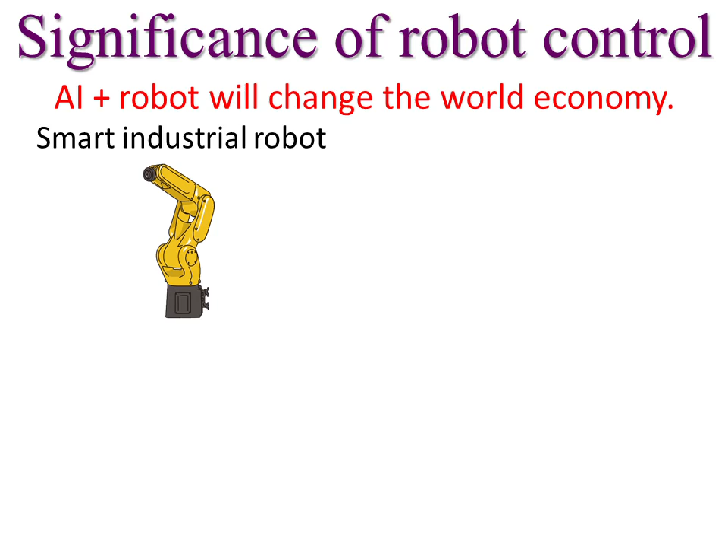In fact, shipments of industrial robots have quadrupled in the last decade. Robot control contributes to the accurate, quick and energy-saving operation of such robots. However, today's industrial robots can't perform as skilled a task as humans do, and many tasks are still performed by humans. In order for robots to replace these tasks, industry requires further innovation of robot control.

Several new robot industries are emerging, and cleaning robots are starting to work in our homes. In the future, mobile robots are expected to perform a variety of tasks in addition to cleaning. In fact, many venture and major companies are actively researching and developing mobile robots. In order for such mobile robots to efficiently perform tasks on behalf of humans while avoiding falling, many technological innovations are still needed, and the innovation of robot control is also required.

Although you don't often have a chance to see it directly, logistics robots are already widely used in practice. Such robots are used in the warehouses of companies that handle huge volumes of products, such as Amazon, to store, organize, and pack products into boxes for shipping. However, there are many tasks that are still performed by humans, such as boxing up a wide variety of products and moving packages into trucks. Further automation is required in the future.

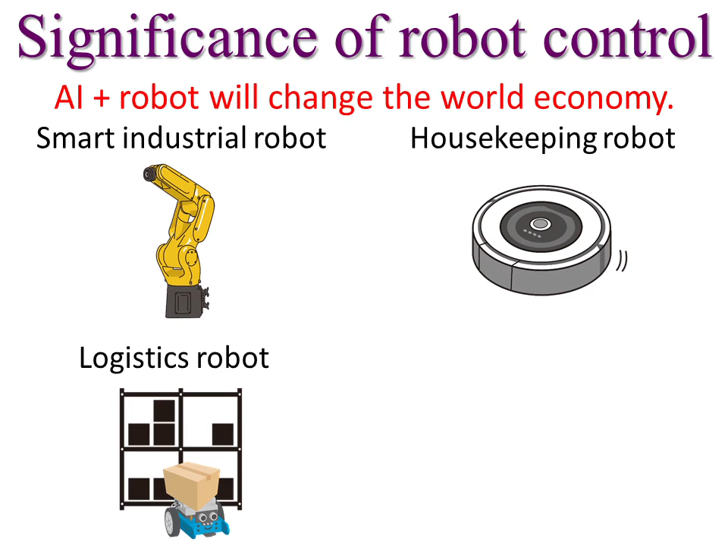For further automation, we need more advanced robot control that can cope with a variety of conditions so that a wide variety of products can be packed into boxes. Medicine is one of the important fields where robotics are making a significant contribution. Surgical robots offer a lot of benefits to medicine. For example, in areas lacking doctors, surgical robots enable highly skilled veteran doctors to perform operations remotely.

In addition, surgical robots can easily scale their motions, enabling delicate surgeries that cannot be performed directly by humans. In addition, the surgical robot can get rid of undesirable oscillations caused by humans' hand tremors. This provides more stable operations compared to normal human surgery. Robotic surgery is also effective in preventing infections from surgeons to patients, because we can remove bacteria and viruses relatively easily from robots. Infections from patients to surgeons can also be prevented, of course.

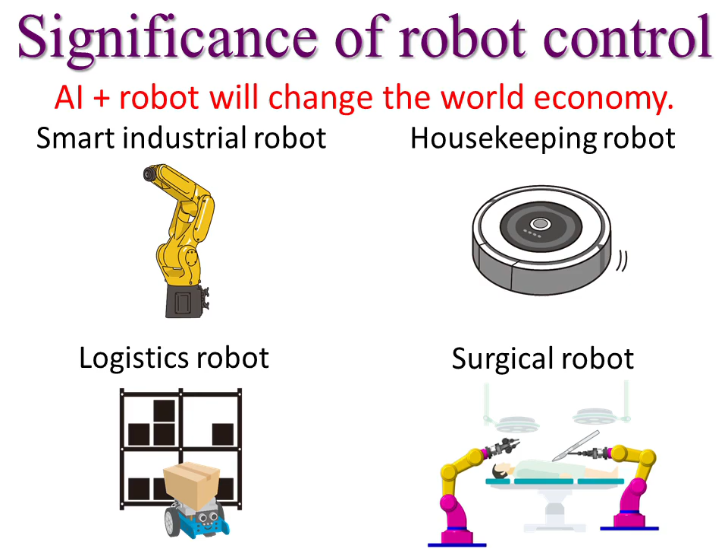Several other robots are also attracting attention. Robots that work in environments where humans cannot enter, such as in space or in nuclear reactors, are also already in practical use. The advancement of robots that support human motions, such as prosthetic limbs, prosthetic legs, walking assist robots, and rehabilitation robots, has also been remarkable. Humanoid robots that can move in a human living space are expected to perform delivery automation. Medical examination robots that prevent coronavirus infections may be developed soon.

The world economy predicts explosive improvements in robot functionality with rapid growth of AI and self-driving car technology that enhance the environment recognition ability of robots in the near future. Advancement of robot control is essential for such technological innovation, and it is really significant for you to learn robot control.

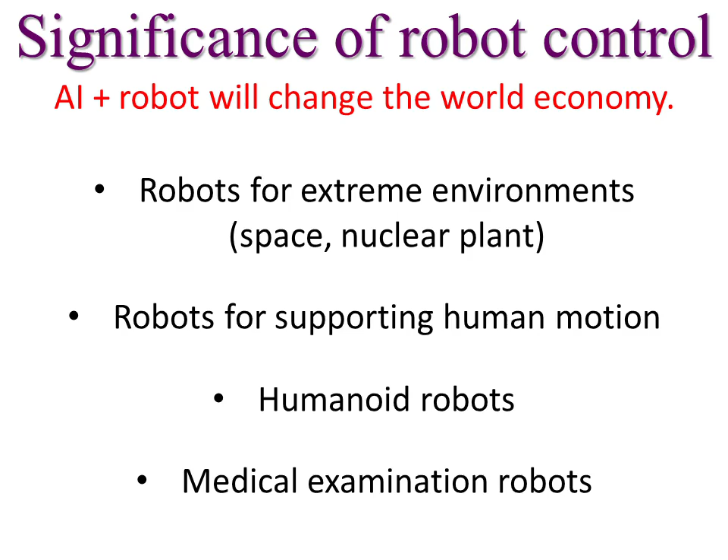Next, before introducing a concrete robot control, I would like to explain the relationship between robot trajectory planning and control. When we control a robot, the first thing to do is to set the desired task. This means deciding what you want the robot to do. Once the desired task is decided, the next step is to design how to move the robot to carry out the desired task. In other words, design the desired motion of the robot. This process is called planning or motion planning.

After the desired motion is planned, the robot is controlled so that the robot actually moves according to the desired motion. This is called robot control. Sometimes the motion planning and control are clearly separated, but sometimes they are not.

Control may include part of the motion planning, or the motion planning may include part of control. This class mainly introduces robot control. To specifically understand planning, I would like to introduce some examples.

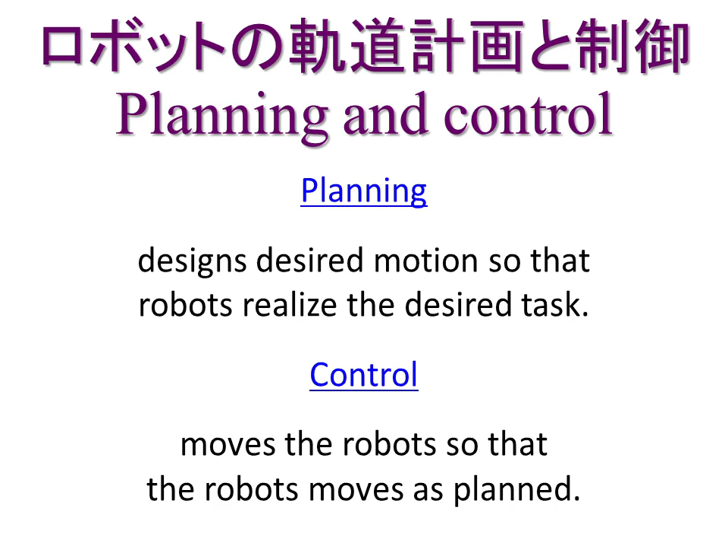The motion planning determines the position of the robot hand to accomplish the desired task. The method of determining the desired hand position that does not move is called point-to-point control, PTP control. In this case, the desired hand position vector xd is a constant vector, and the time derivative of xd is then a zero vector. This method does not specify a path from the current position to the desired position. Therefore, PTP control is suitable for tasks such as pick-and-place tasks where only the final position to reach is important.

The other method for determining the desired hand position that moves over time is a method called continuous path control, CP control. In this CP control, the desired hand position vector xd(t) depends on time, and the time derivative of xd(t) is the desired hand velocity. CP control continuously specifies the position where the robot hand should pass through, and CP control is suitable for tasks such as painting in which the path of the robot hand is important.

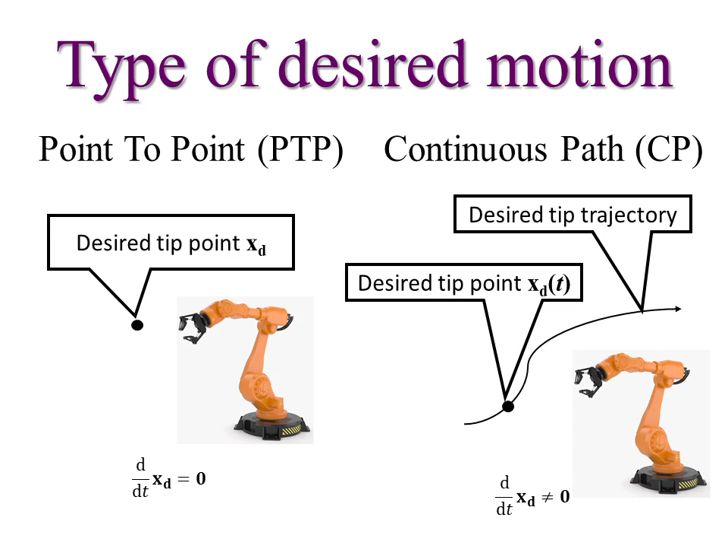The terms PTP control and CP control are often used in the field of robot control. So let's take advantage of this opportunity to understand them. I would like to start the concrete introduction of robot control. Before introducing advanced control, let's review PD control, which is the most basic control, by concretely creating a program.

Let's use MATLAB and Simulink to create a simulation program. In order to master all the advanced control that I will introduce in the future classes, you should implement them in MATLAB and Simulink. By actually implementing these controls, you can understand them deeper and more clearly.

In this exercise, we consider the one-link robot that moves in a plane where gravity does not act, as shown in the illustration. You should implement PD control that enables the robot joint angle q to converge to the desired angle qd. To do this, we create a robot simulation using MATLAB and Simulink. As I'll explain in detail at the end of this video, this exercise is homework for this week.

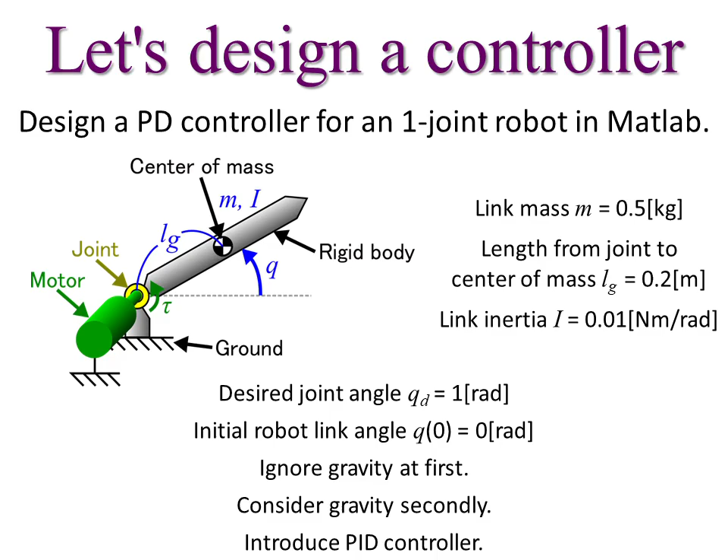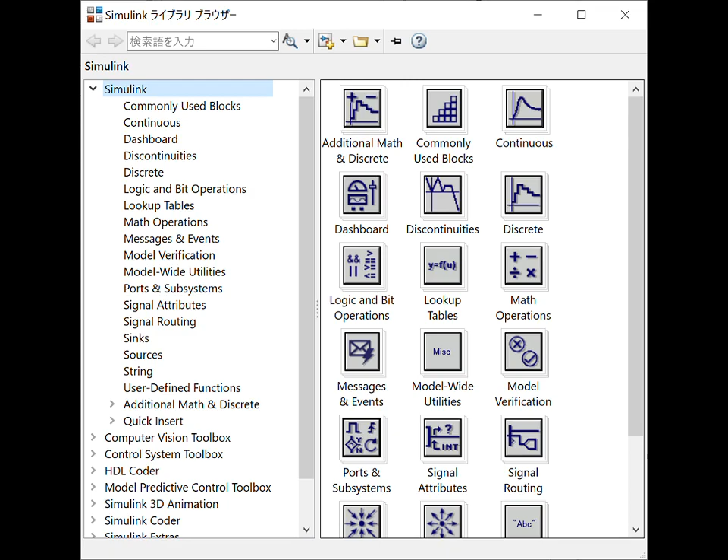When the library browser is started up, a window like this will appear. The library browser has blocks with various functions. When you create a simulation, you paste some blocks into the area of the simulation model. Drag MATLAB Function in User-Defined Functions and paste it in the blank area of the simulation model.

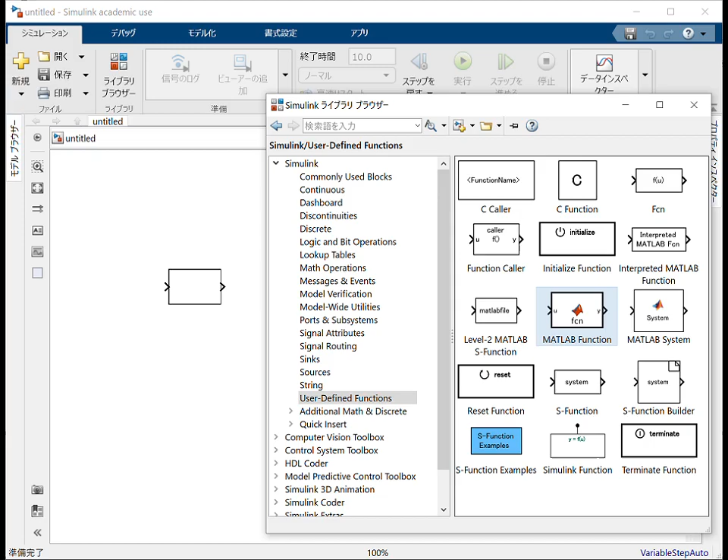Then, the block of MATLAB Function is placed like this. This block is assumed to represent the controlled object, that is, the physical robot. To edit the program inside this block, let's double-click on the MATLAB Function block. Then you can edit the program source using a screen like this.

The first line of the program source describes the output, function name and input of this block. In the case of the robot, the input is joint torque tau and the output is joint angular acceleration ddq. Let's name the function robot dynamics. Therefore, let's change the first line like this.

Next, let's calculate the output ddq from the input tau. By using the motion equation of the robot, you can derive the relation between the torque tau and the joint angular acceleration ddq. Then, you can write a program that calculates ddq.

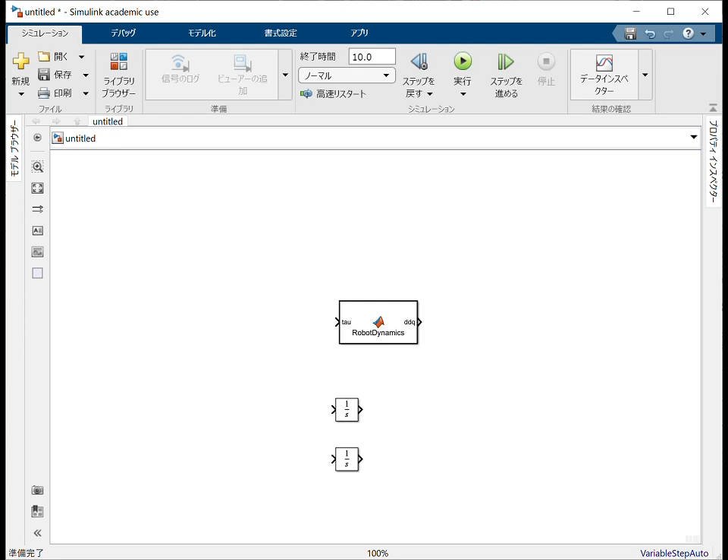Because the target of time integration is the output of the robot dynamics block, let's right-click and drag the arrow on the right of the block to the arrow on the left of the integrator. Then, the two blocks will be connected like this. As a result, the acceleration output from the robot dynamics block is integrated and becomes the joint velocity.

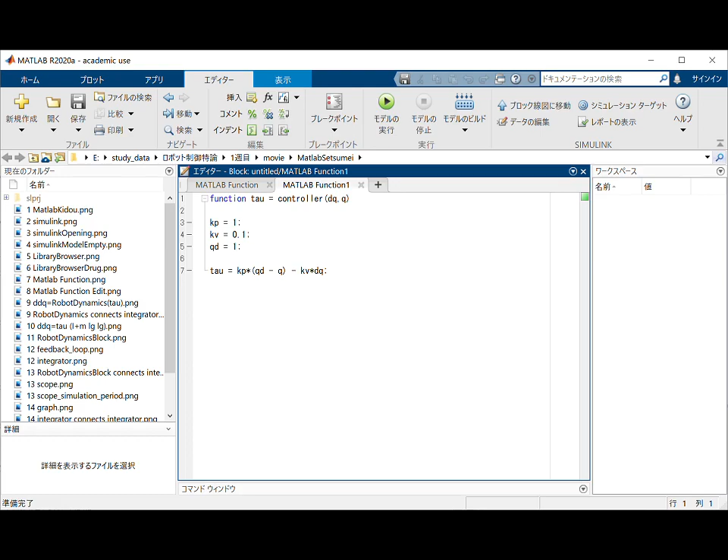Similarly, by connecting the output of this integrator and the input to the other integrator like this, the final output will be the joint angle. Next, let's create a block of the controller. For the control block, use the MATLAB function block as well as the robot dynamics block. You can make it using the library browser as before, but we can create it faster by copying and pasting the already existing robot dynamics block.

After creating another MATLAB function block, double-click on it to edit the program as before. The control block should input the angular velocity and angle and output the torque. Therefore, let's write the angular velocity dq and the angle q in the input part and tau in the output part like this figure. Let's name the block controller.

Since PD control is used for control, the torque value is determined by the formula shown in this figure, where Kp is the position feedback gain, Kv is the velocity feedback gain, and Qd is the desired joint angle. Because this exercise aims at PTP control, the value of Qd is always set to a constant 1 radian. The position feedback gain and velocity feedback gain can have different values.

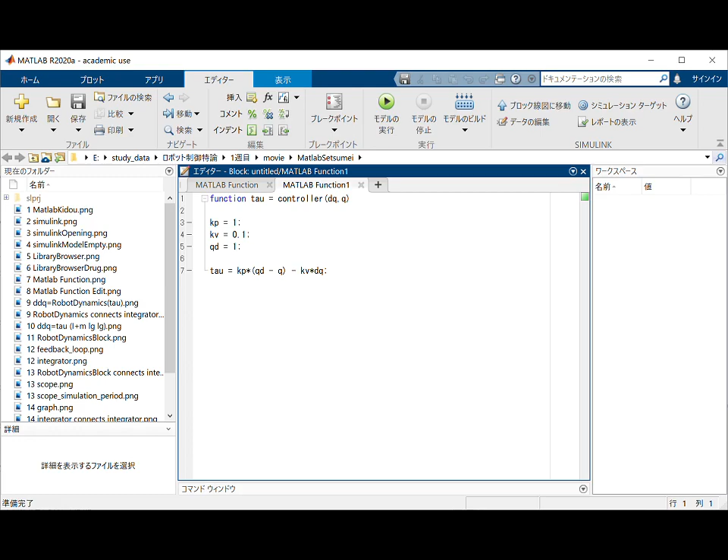This determined torque can be generated in the motor attached to the robot joint by using a motor driver that can control the electrical current. This control block represents this series of processing. After writing the program, let's save the data and display the simulation model.

Next, let's connect the joint angular velocity, which is the output of the first integrator, to the input dq of the control block. Therefore, right-click in the middle of the line connected from the first integrator to the second integrator, and branch to connect to dq. Let's connect the output of the second integrator, the joint angle, to the input Q of the control block.

Let's connect the output tau of the control block to input tau of the robot dynamics block. We have now completed the feedback control simulation. You can see that the simulation model created on Simulink is almost the same as the block diagram. Next, let's place a scope on the model from the Sinks of the library browser in order to visually confirm the simulation results.

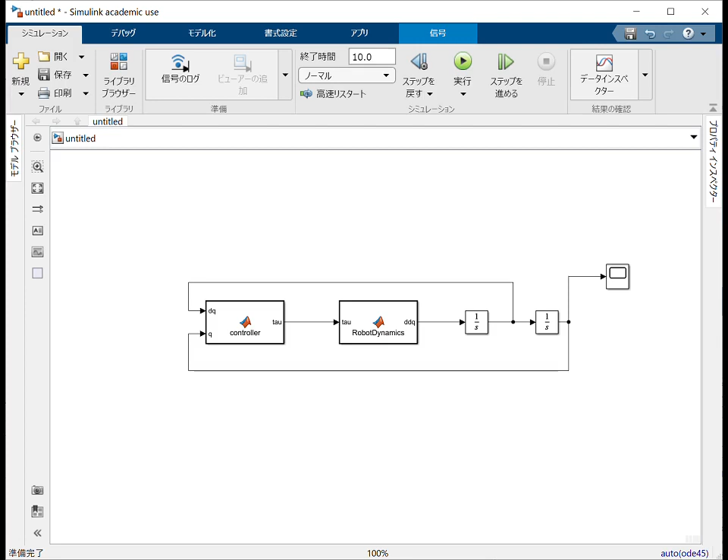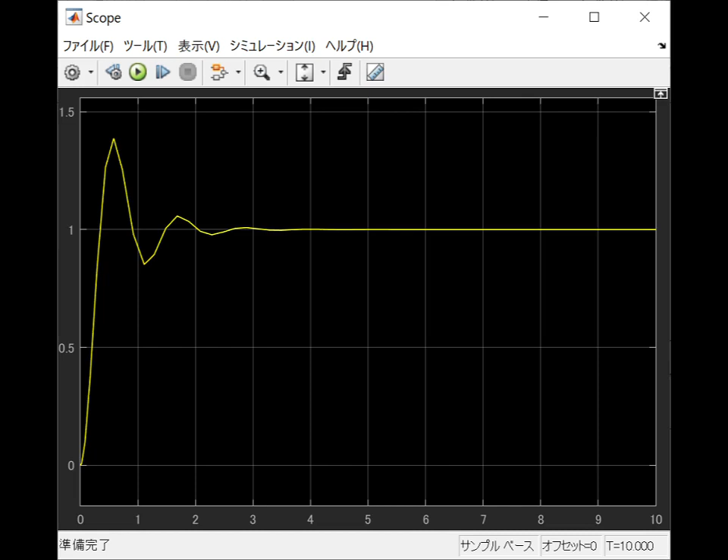Many researchers in the world have proposed huge kinds of control. However, most of these controls are based on these 5 basic controls. Therefore, understanding these basic controls is essential for understanding advanced robot control. In this class, I would like to explain the details of these basic controls and introduce outlines of some advanced robot control.

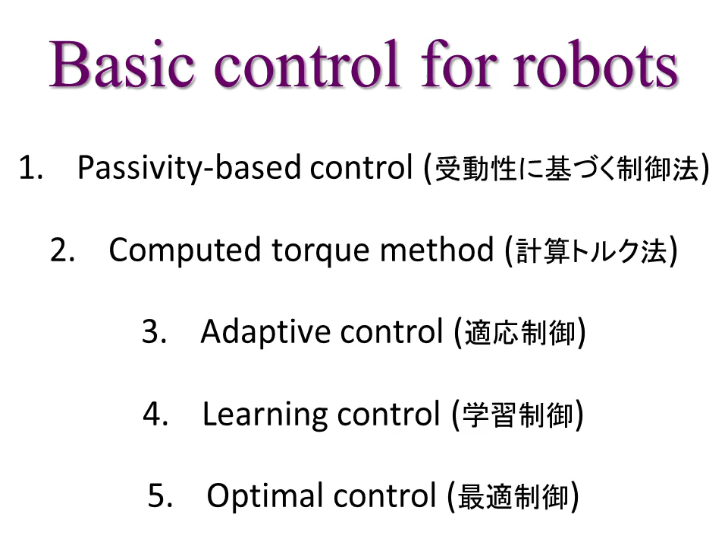Before we go into the details of each control, I would like to introduce the features of each control. First, the features of passivity-based control are as follows. Passivity-based control mainly consists of feedback. Therefore, this control is mainly used for PTP control.

Since this control does not use feed-forward, it is not suitable for CP control. This control works even if the detailed parameters of robots are unknown. Therefore, this control has a great advantage that it works stably even in uncertain environments. It also has the advantage of low computational cost. Due to these advantages, this control can be easily implemented in actual robots.

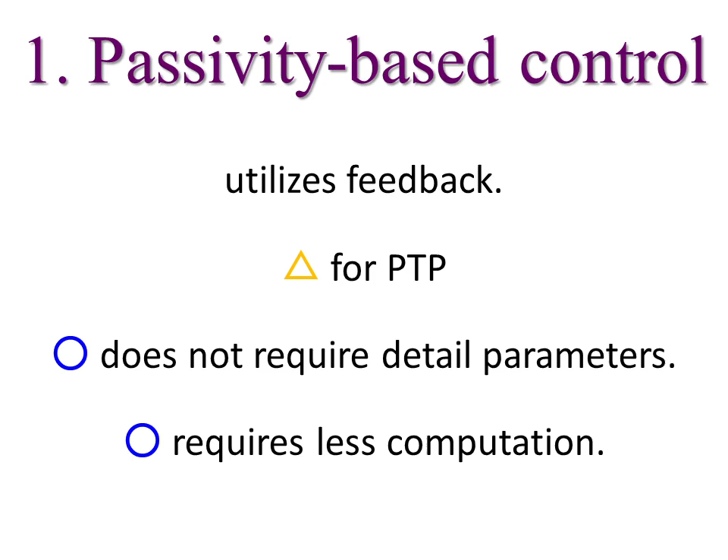The characteristics of the computed torque method are as follows. The computed torque method is a method of calculating the feed-forward torque required to generate the desired motion. Feedback is also utilized together with the feed-forward for stabilization. Due to the feed-forward effect, the computed torque method has the advantage that it realizes CP control.

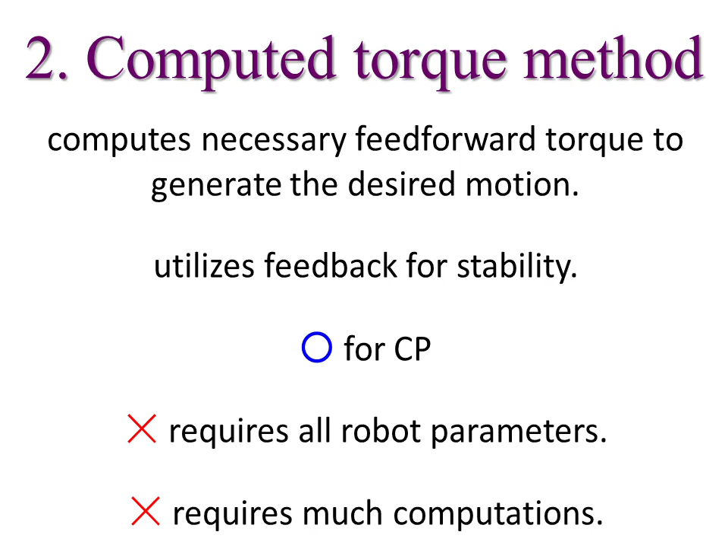However, detailed models and parameters of the robots are required for calculating the required torque. Therefore, the computed torque method has the disadvantage that it is not suitable for systems involving uncertainty. Another disadvantage is that it requires a lot of numerical calculations to calculate the required torque. As a result, the computed torque method needs a lot of computational resources, which sometimes prevents implementation in actual systems.

Adaptive control estimates the parameters of robots in real time and calculates the required torque with the estimated parameters. After the estimated parameters converge so that the required torque can be calculated accurately, the robot will be able to follow the desired trajectory and CP control will be realized.

Therefore, the advantage of adaptive control is that we don't need to know the parameters of the robots in advance. However, since the computational cost is the same as the computed torque method, it has the disadvantage that it requires a lot of computational resources and is difficult to implement in some situations.

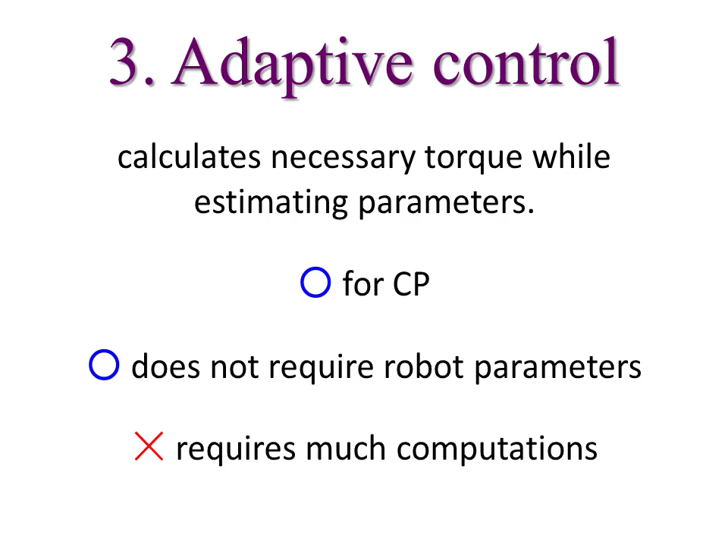Iterative learning control is a control method that learns feed-forward torque through control trials. If feed-forward torque is accurately obtained by the learning, this control realizes CP control. This control method also has the advantage that we don't need to know the parameters of the robots in advance, because the feed-forward torque can be obtained by learning.

Because the learning is done by very simple calculations, learning control also has the advantage of low computational cost and easy implementation. However, it has the disadvantage of requiring a control trial to learn the feed-forward torque.

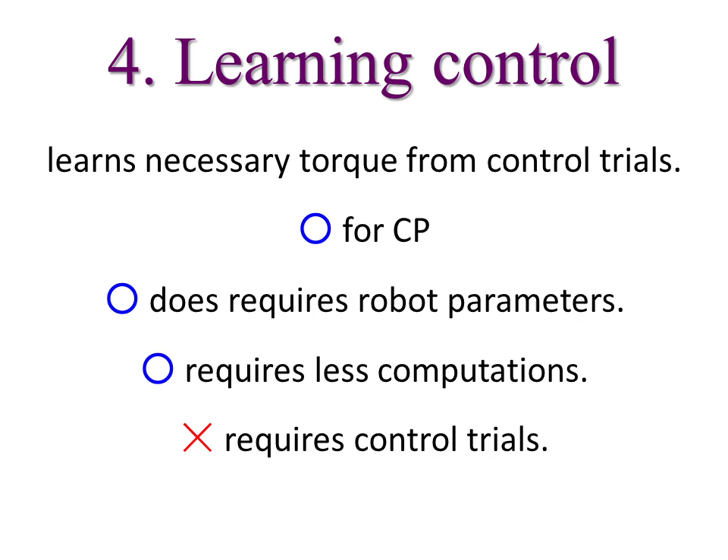Optimal control is a method to calculate the feed-forward torque or motion that minimizes the cost function defined by the control designer. Optimal control is an excellent method that can achieve various objectives such as minimizing energy consumption and controlling in the minimum time.

However, optimal control has the disadvantage that the robot parameters must be known. In addition, optimal control requires enormous computations to obtain the optimal feed-forward torque or motion. Therefore, optimal control is difficult to execute in real time.

This concludes the explanation of the main features of basic robot control. If you understand these features, you will be able to choose the appropriate control when you design control for your robot. Now, let's move on to a detailed explanation of each control.

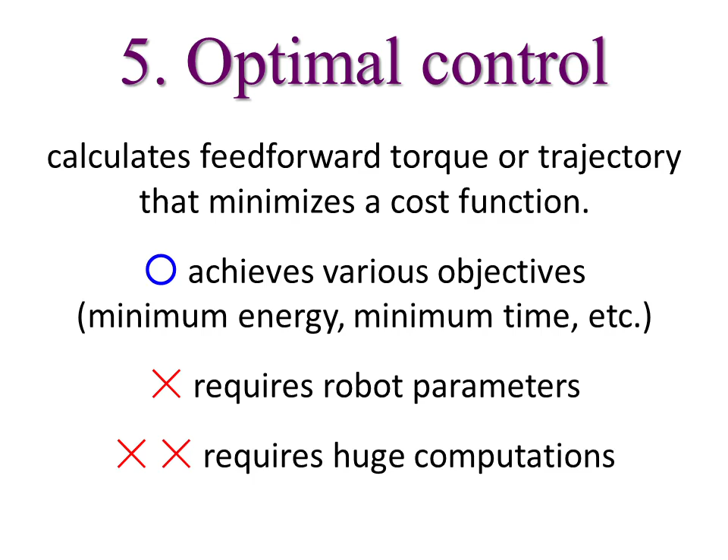First, I would like to explain the details of passivity-based control. The passivity-based control method was established by Professor Arimoto from 1981. This control method is a unique technology that was born and has grown in Japan. Ritsumeikan University has made many contributions to passivity-based control. Professor Kawamura, Professor Jan, Professor Ozawa, and I have contributed to this technology.

This control method achieves the control objective by adding artificial potential energy to the robot. For example, let's consider the case where a spring and a damper are attached to the joints of the robot as shown in this illustration. The torque generated in the robot joint by this spring and damper can be written as tau equals K

(qE minus q) minus D q dot, where K is a diagonal matrix that represents joint stiffness, qE is a vector that represents the equilibrium joint angle of the spring, q is a vector that represents the joint angle of the robot, and D is a matrix that represents the viscosity of the damper.

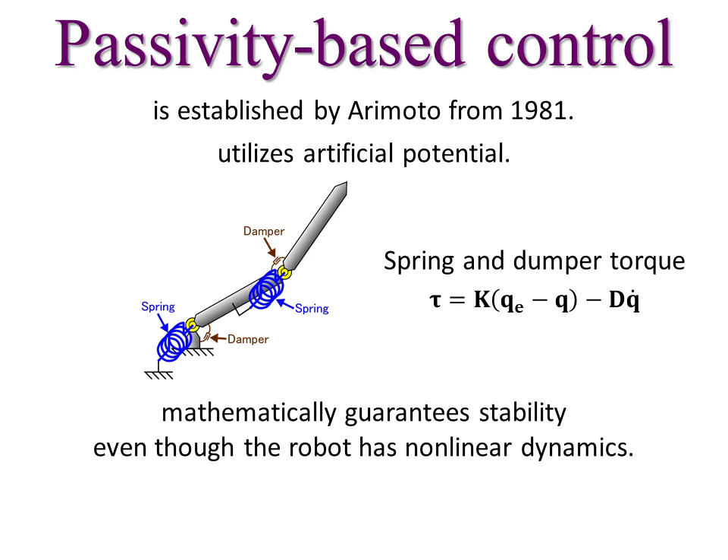In other words, by using mechanical energy, the convergence of motion can be guaranteed mathematically even though the motion equation of the robot is nonlinear. Passivity-based control takes advantage of this property. In the passivity-based control method, actuators attached to each joint of the robot artificially generate the torque of the spring and damper.

Therefore, we can prove that this control method guarantees convergence of the joint angle q from any initial angle to the desired angle qd by using the energy analysis. Since the formula of the controller is the same as that of the classical PD controller, we call it passivity-based PD control here.

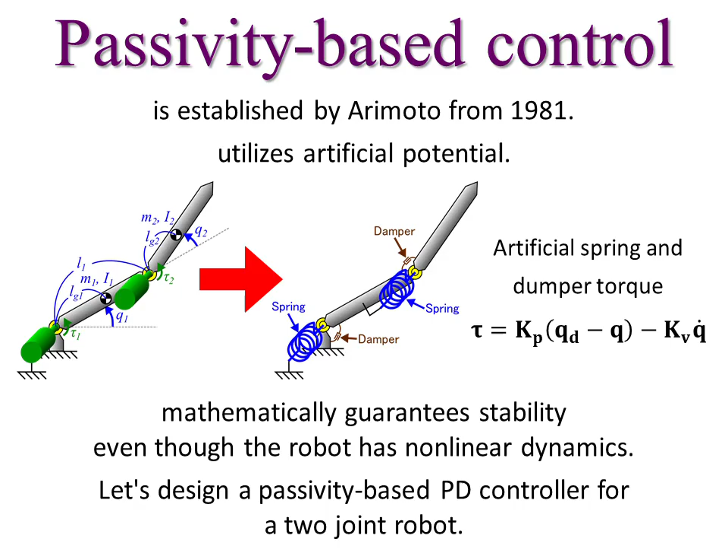Now, let's create a simulation on MATLAB that implements passivity-based PD control on a two-joint robot, in order to obtain a deeper understanding of passivity-based PD control and to become familiar with it. To simulate a two-joint robot in MATLAB, edit the robot dynamics block as follows.

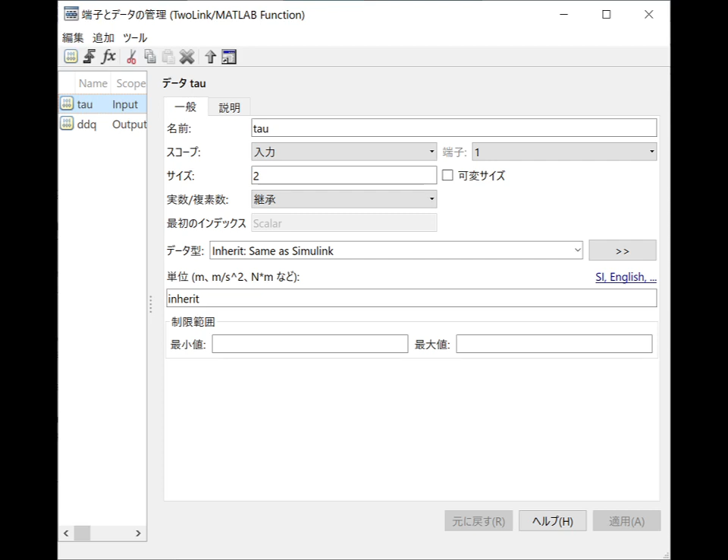Finally, I would like to introduce homework for this week. This week's homework is to create the MATLAB simulation I described this week and submit it as a report. In the report, please include the figure of the Simulink simulation model, the program source of the robot dynamics block, the program source of the controller block, the simulation result graph, and the explanation of the simulation contents and the simulation result. Please submit the created report through Manaba.